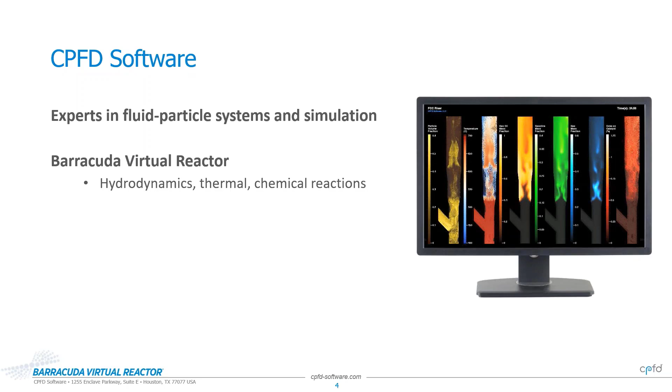Really, the software is used to look inside large-scale industrial units, assessing performance through simulation, determining the root cause of underperformance, what's happening inside where you might not be able to see, and reducing the risk of changes through virtual testing, testing changes, design or operational on the computer instead of on your actual unit. And a side effect is you often identify additional optimization opportunities, and this is true whether the software is used on designing new systems or troubleshooting an existing unit.

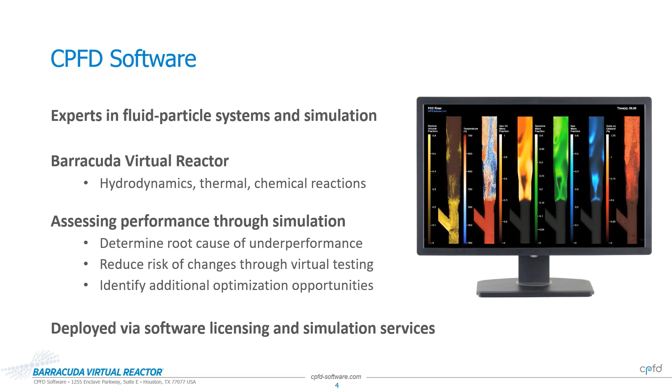Virtual Reactor is deployed with software licensing and simulation services. So there's my introduction. We're glad you're here.

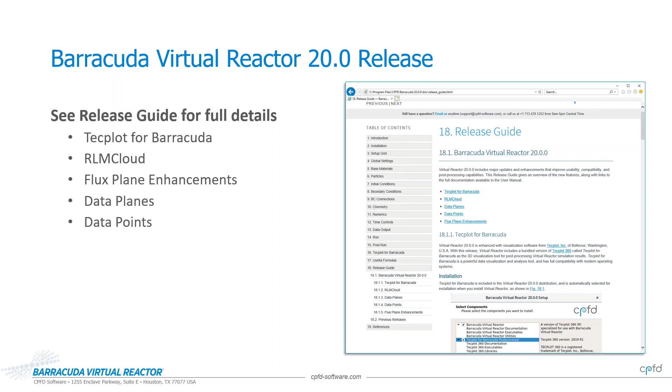The first feature I'd like to talk about is version 20 support for RLM Cloud, which is an easy-to-use cloud-based solution for serving Reprise License Manager, or RLM, licenses. There are several reasons you might want to use RLM Cloud instead of or in addition to a traditional on-premise RLM server.

One, it eliminates the need to configure and maintain an on-premise RLM server, which can reduce IT administrative tasks. Two, it allows you to easily serve RLM licenses to cloud computing resources, such as machines running on AWS, Google Cloud, Azure, and others. And three, it allows you to easily increase your license count, for example, if you need some short-term licenses to meet a project deadline.

If you're interested in learning more about RLM Cloud or switching your current on-premise RLM license to RLM Cloud licenses, you can contact us and we'll be happy to help.

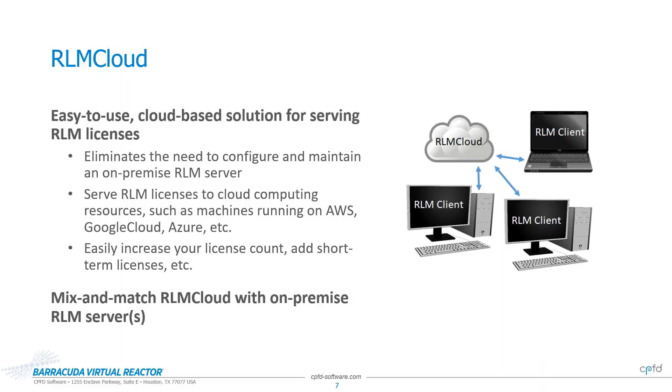So I'm going to drop out of PowerPoint now and bring up a Virtual Reactor version 20 GUI to demonstrate a few things. Related to RLM Cloud specifically, we built a new license manager interface to make it easy to point RLM client machines to both on-premise and RLM Cloud license servers.

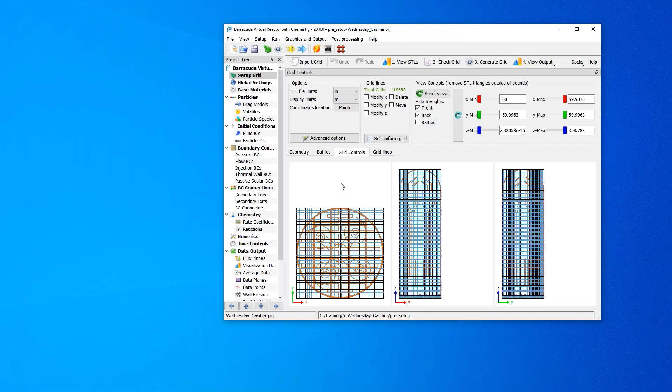So let's take a look at flux planes first. For anyone who's not familiar with flux planes, these are high-frequency output files that allow you to track fluid and particle flow through specific planes in a Barracuda simulation. You can get detailed information about the composition of all materials flowing through flux planes as well as raw particle data. Flux planes are extremely useful and many Barracuda users make extensive use of them.

In version 20, we've improved the way that users specify the location of flux planes within the simulation domain. When you click on the Select Plane button, you now get a reference grid dialog that allows you to click and drag to specify the position and size of each flux plane. You can grab the edges of the red rectangle to change the flux plane size. You can click and drag within the red rectangle to move the flux plane.

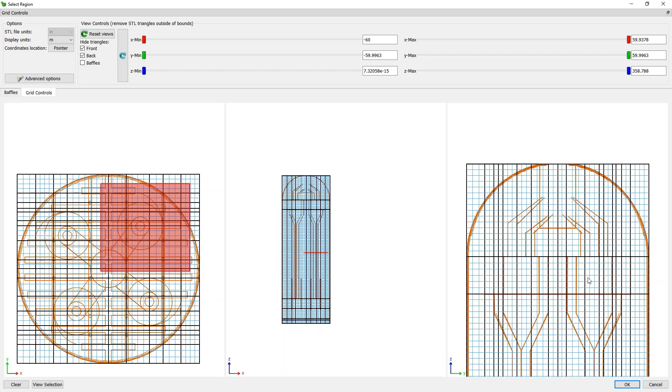And then when you click OK, the XYZ limits of the flux plane are filled into the text boxes based on the graphical region you defined. You can still type numbers directly into the text boxes if you know the exact position you want for the flux plane, or you can use the min and max keywords to refer to the minimum and maximum extents of the simulation domain.

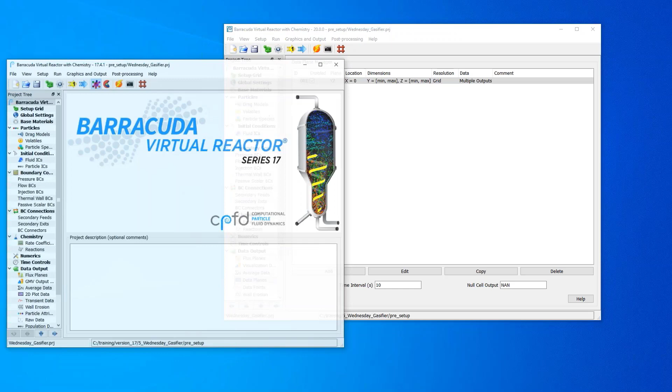So next, we'll go to the data plane section of the GUI. This used to be called 2D plot data in previous versions of Barracuda. So I've brought up a version 17.4.1 GUI as well, just to remind you how this dialog used to look in case that's helpful. Data planes offer a way of getting relatively low frequency information from a simulation at points spaced evenly on a 2D plane within the domain.

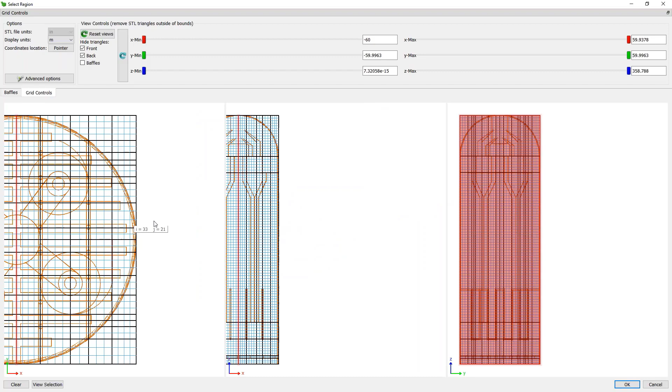Barracuda users often use this kind of output to create plots of temperature versus height or fluid velocity versus radial position, for example. In version 20, Data Planes has a list manager style similar to other sections of the Barracuda GUI, and there's no limit to the number of data planes in any orientation. So if we open up the definition for a data plane, you can see that it can be located graphically using the click and drag with the mouse, very similar to flux planes, or by typing in the XYZ coordinates directly.

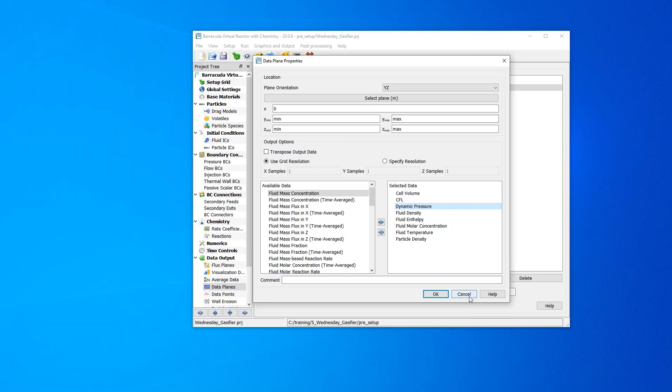A selection manager in the bottom half of the dialog allows you to select as many data output items as you want from the left side, and then bring them over to the selected data list on the right side. There are a few other options here in this dialog, but for the sake of time, I'm not going to cover them right now. But if you click on the Help button, it will bring up the data plane section of the user manual with full details.

So exiting this data plane definition, a couple more things are worth mentioning. First, we've added a new text box where users can specify a string they want to use for the null cell output. This will make post-processing data plane information easier, allowing you to specifically exclude any null cells that are outside of your simulation domain. Secondly, we've improved the naming conventions for the data plane output files so that they're easier to find and identify in your project directory.

All data plane output files begin with the word plane and then are named intuitively to help you quickly identify the variable contained in each file. One thing to note is that this improved naming convention is only applied to new projects created in version 20

by default. The reason for this is that if you define 2D data output in an older version of Barracuda, you probably already have post-processing scripts that refer to those files that use the older naming convention. So we didn't want to break those scripts if you bring your project up to version 20. So it is possible to switch to the new naming convention, and you can contact support if you want to do that.

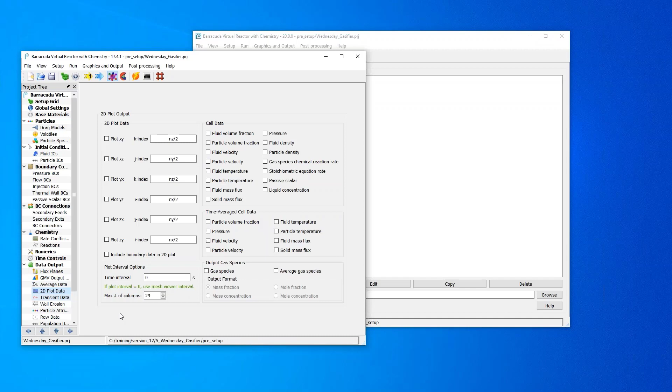The last data output enhancement that I'll discuss here is data points. This used to be called transient data in previous versions of Barracuda. Again, I'll bring up a 1741 GUI to show what this used to look like. So data points are high-frequency data output entities located at specific points within the simulation. Barracuda users often place data points in locations where they have thermocouples or pressure taps in their physical systems in order to get the same kind of data from virtual reactor simulations.

In the version 20 release, the data points interface has been reworked to use a consistent list manager style that you see throughout other sections of the Barracuda GUI. You can define as many data points as you like, and if we open up a data point definition, you'll see that we've added the ability to graphically select the point location using the Select Point button.

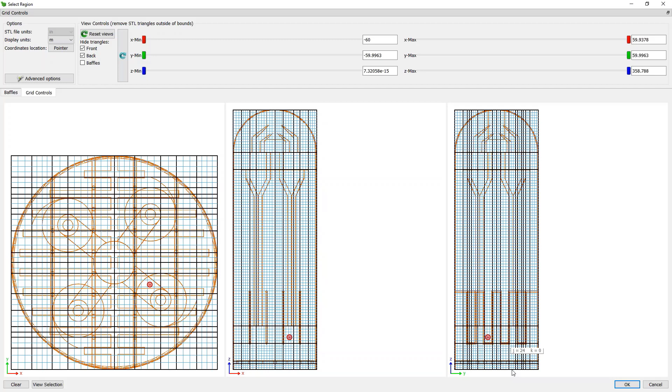This brings up a reference grid dialog that allows you to click and drag the red point to locate it within the simulation domain. When you click OK, the XYZ coordinates of the point are populated in the text boxes. You can type in XYZ values directly into these text boxes as well if you know exactly where you want your data point to be located.

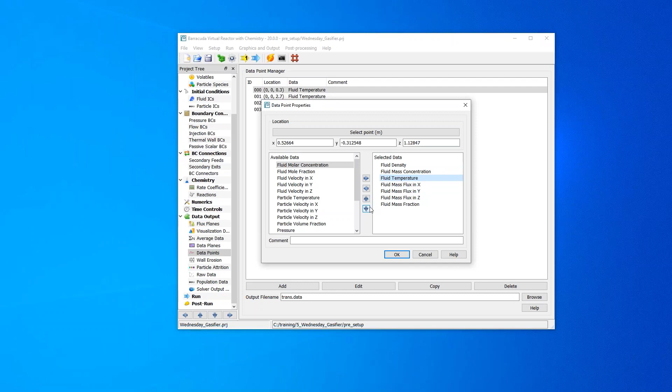An available data, selected data interface, similar to the one we just saw in data planes, is used for data points as well. You can choose as many items from the left as you want and bring them over to the right for inclusion in the output file. All of these selected items will be output for the specific location in space. And you can reorder columns of data in the output file by using the up and down arrows. So that covers the data output enhancements for version 20.

So let's turn to Tecplot for Barracuda, our new default post-processing tool. First, a few details that I want to mention regarding this bundled version of Tecplot 360. One, your license to use Virtual Reactor 20 also includes a license of Tecplot for Barracuda at no additional charge. This allows you to post-process virtual reactor simulation results with Tecplot 360. Two, Tecplot for Barracuda uses the same RLM server as Virtual Reactor in order to check out a license. There is no license imposed limit on the number of instances of Tecplot for Barracuda you can open simultaneously.

And three, a full Tecplot 360 license, which is not included as part of Tecplot for Barracuda, is required to post-process simulation results from other products. And so please contact Tecplot directly if you would like to purchase a full Tecplot 360 license.

Now, some of you may have watched our previous webinar presented in conjunction with Tecplot, which was called Getting Started with Tecplot for Barracuda. In that webinar, we looked at many things that Tecplot can do from a high level, including some advanced post-processing topics. But today's webinar will be different in that our goal is to show you step-by-step instructions for day-to-day post-processing tasks. We're going to go slower, narrate each click, and explain things as we go. We won't get into advanced topics, but rather we want to cover the basics in more detail.

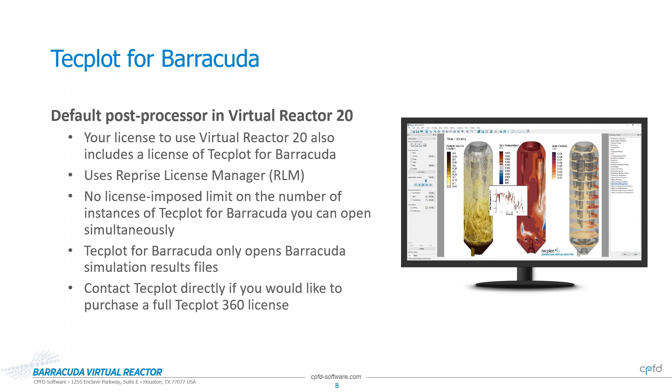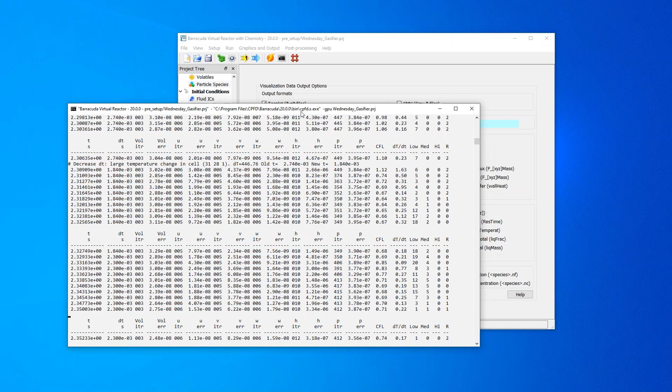So for our demonstration today, I started this simulation just before the webinar in order to have a few results files available, but the simulation is still currently running so that we can show you how to rescan for new results files. So to open Tecplot for Barracuda, you can use any of the buttons in the GUI for 2D or 3D visualization. So I'm going to click on the View Boundary Conditions in the Run window.

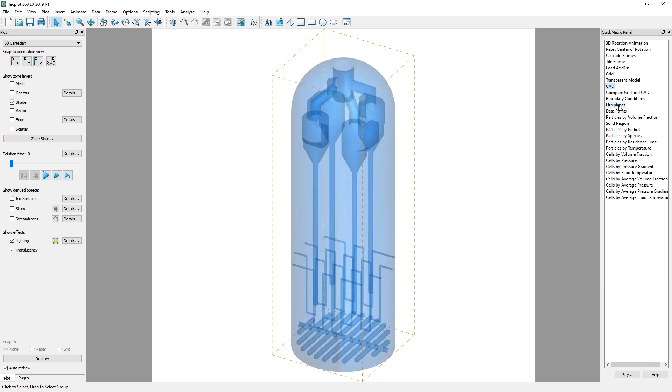And on the right-hand side of the screen, there is a quick macro panel with the shortcuts to all of the predefined views you might be familiar with from the Barracuda GUI. Double-click on the items to bring up the views such as Grid, CAD, Fluxplanes, Data Points, Particles by Volume Fraction, and so on.

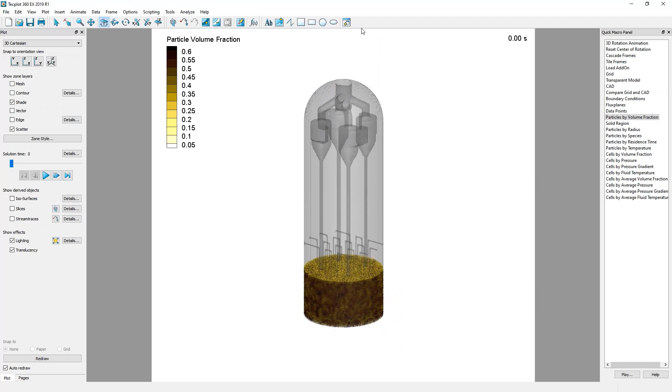You can manipulate your view by using buttons in the top toolbar. For example, there are several rotation methods available. You can choose one and then click and drag to rotate the model. You can right-click and drag to translate the model. And click and drag the middle mouse button for zoom. Push away from yourself to zoom out and pull towards yourself to zoom in. And then you can right-click to exit any special mouse mode you're in and get back to the regular select mode.

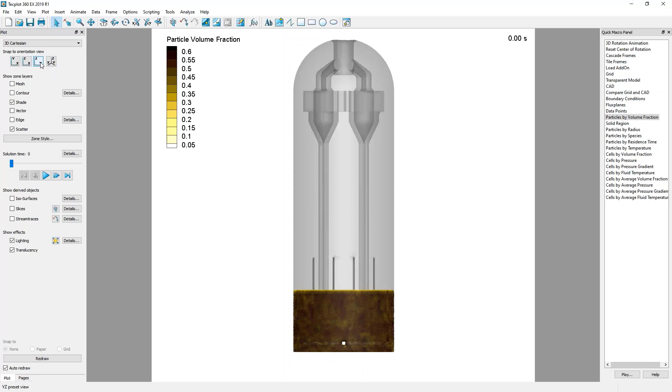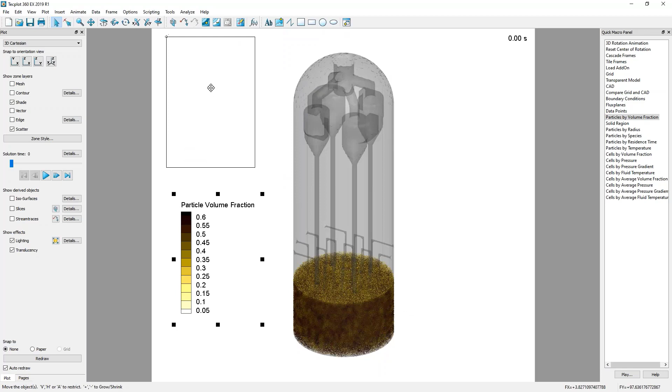There's a set of snap to orientation view buttons that are quite nice for getting views at a specific angle. You can look straight onto the model in the 3 major directions or get back to the default angles by using the rightmost button. Within the Tecplot interface, many items can be selected by clicking and edited by right-clicking or double-clicking. You can also move items around within this frame by clicking and dragging, and then most items will show available options if you right-click on them.

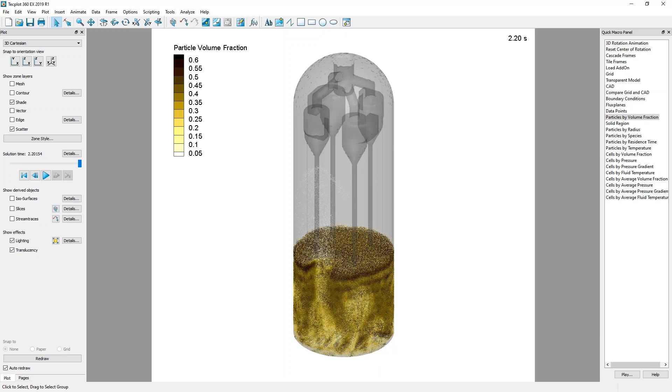Barracuda simulations are transient, and you'll often need to move from one time step to another within the Tecplot interface. The solution time slider and controls allow you to do this very easily. You can drag the solution time slider to any currently loaded time, or you can use the control buttons to play through time, step forward or backward one solution time, or go to the beginning or end time steps. So if I go to the end time step here, you can see that we're out 2.2 seconds.

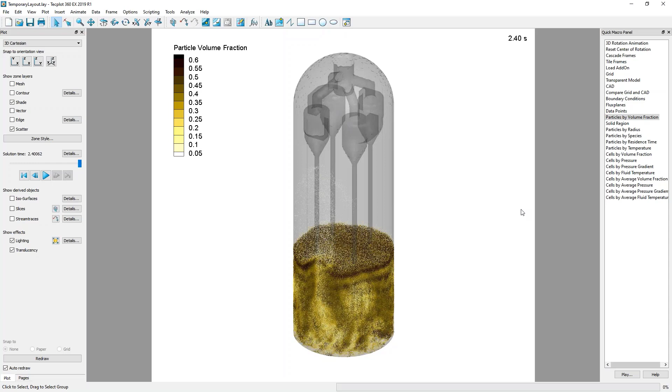Since the simulation has been running in the background, we can now rescan to load any new output files that have been created by Barracuda since we opened this Tecplot GUI. To do this, click on File, Load Barracuda Data, and click on the Rescan All Data button. Okay, then click on the Go to End Time Step button, and now we can notice that the time is 2.4 seconds.

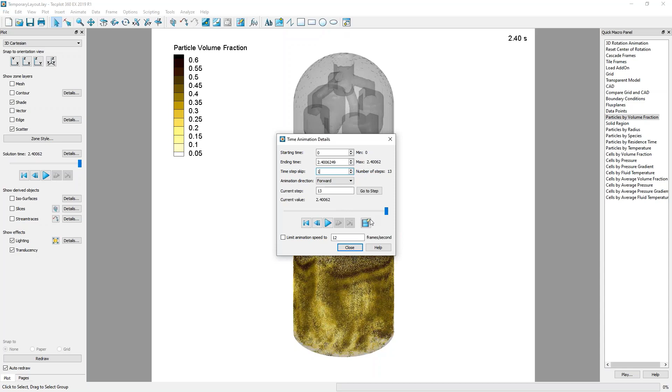So creating an animation of the current view is done using the Details button. Click it to open the Time Animation Details dialog. Tecplot gives you a lot of options here, including the start and end time for the animation, as well as the ability to skip steps. Click the movie reel icon to open the export dialog. Here you can choose from many different output formats, including video and image sequence formats. In this dialog, you can also adjust a number of other things, including the animation speed for the output video file.

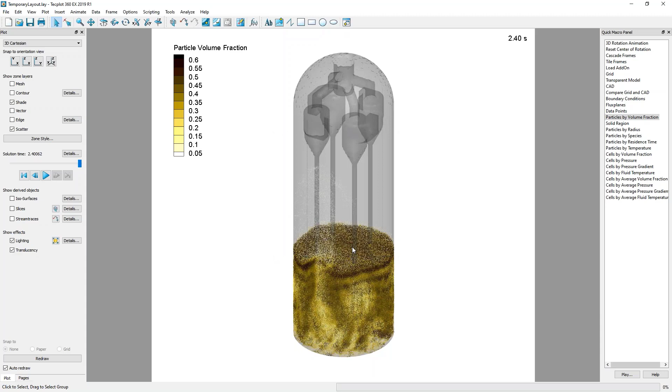Okay, next, let's look at adjusting the color bar. Double-clicking the color bar brings up the Contour & Multi-Coloring Details box. There are many things that you can adjust within this box, so I encourage you all to explore it on your own as you start using Tecplot. Tecplot also has great documentation built in, so you can always click the Help button to get full details on all available options. For today, I'll focus on just a few of the most basic things that Barracuda users will want to use on a day-to-day basis.

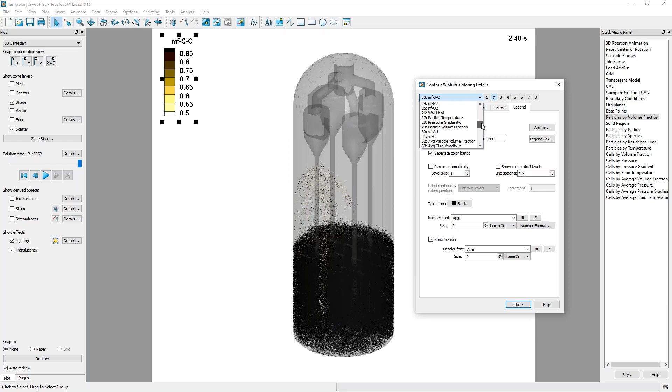First, notice the drop-down box on the top left of the dialog. This shows the currently selected variable by which your cells or particles are being colored. You can select different variables by using the drop-down and clicking on the variable name. Note that all the possible variables are shown in the list, so you need to select the appropriate cell or particle variables based on the context of what you're doing. For this example, though, we'll stick with particle volume fraction.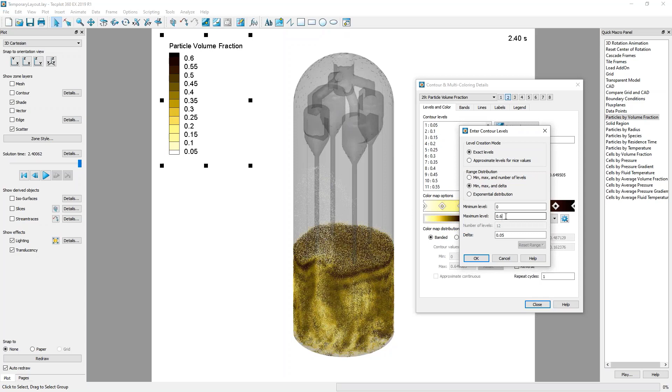So next, let's click on the Levels and Color tab. A common task when post-processing is adjusting the numerical limits of the color bar. This lets you zoom in on specific ranges of data and highlight important details of the simulation results. Use the Set Levels button to bring up the Enter Contour Levels dialog. We've found that the Min, Max, and Delta option is very nice. Here, let's set the Min to 0 and leave the Max at 0.6 and set our Delta to 0.1. When we click OK, you can see that the numbers on the color bar have been adjusted accordingly.

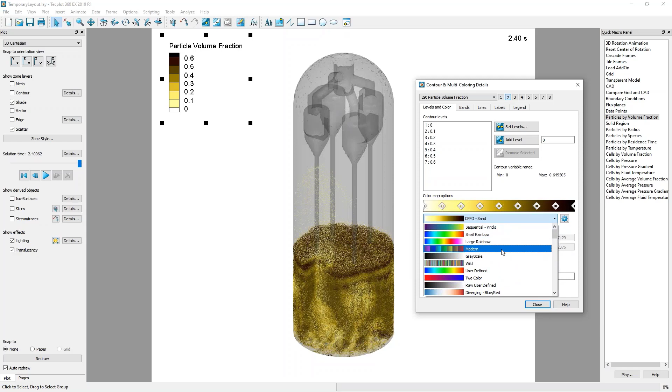Another nice feature of Tecplot is that it has a very large selection of built-in color maps. You can click the drop-down menu to see all of the available options. So if you feel nostalgic about GMV, you can always choose Small Rainbow and you'll feel right at home. It's also very easy to reverse your color map by checking the reverse box.

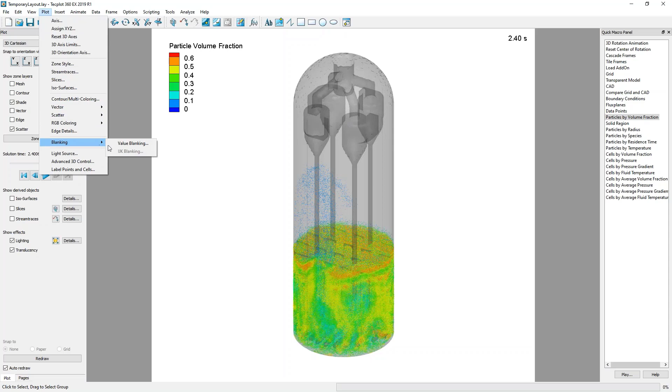The next topic I'd like to cover is blanking. In Tecplot, the concept of blanking allows you to hide specific cells and/or particles based on a user-defined criteria. You can go to the Plot menu and choose Blanking, Value Blanking. And let's start with the particle phase.

In the Wednesday gasifier, we have 2 particle species in the fluidized bed. Species 1 is our initial bed, and species 2 is fresh coal that is fed in at the side of the vessel. So let's blank species 1 so that we only see species 2. First, check the box for Include Value Blanking. Then we'll set our criteria to blank when the species index is equal to 1.

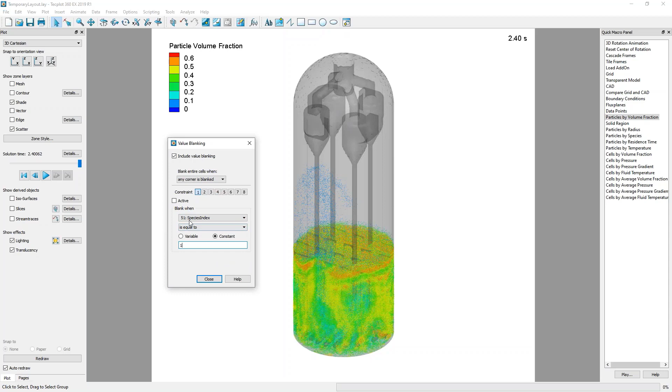When we click the checkbox for active, we can see that this blanking criteria has been applied because the initial bed particles are no longer visible. Blanking can also be used to show spatial subsets of the system by hiding cells. Our particle blanking definition used constraint number 1, and you can see that up to 8 constraints can be defined at the same time. Let's use constraint number 2 to blank when y is greater than 0.

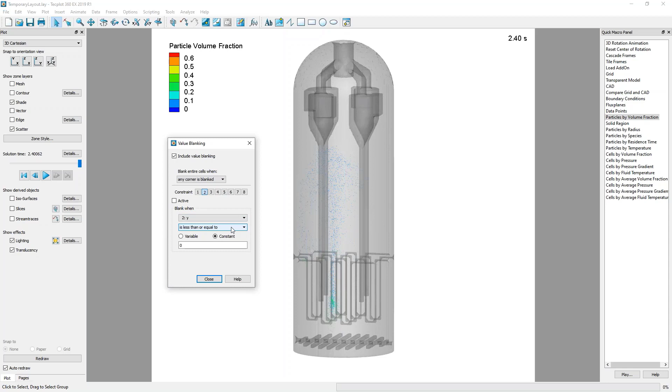When we make this blanking criteria active, we can see that both cells and particles that meet the criteria are hidden from view. So next, I want to introduce the Zone Style dialog. Click the Zone Style button to bring up this window. Almost every aspect of the view shown in Tecplot can be adjusted in this dialog, and you can see that there are many tabs, rows, columns, and settings available to let you work with your view.

For now, I'd like to point out something specifically related to particle blanking. When we blank particles, it is often the case that the remaining particles on screen are a little difficult to see clearly. The default view for the particles is a single pixel, which works well for full beds of particles, but can be tough when you're looking at just a small number of particles.

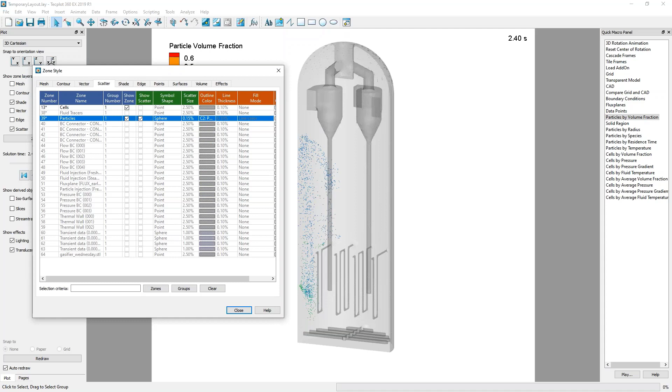So you can right-click the symbol shape column in the particles row and choose sphere. Right-click the scatter size and choose 1%. We can now see the particles much more clearly. The rendering time for spheres is longer than for single pixels, but in cases like this, it's still very fast, and it helps us to see our data more clearly.

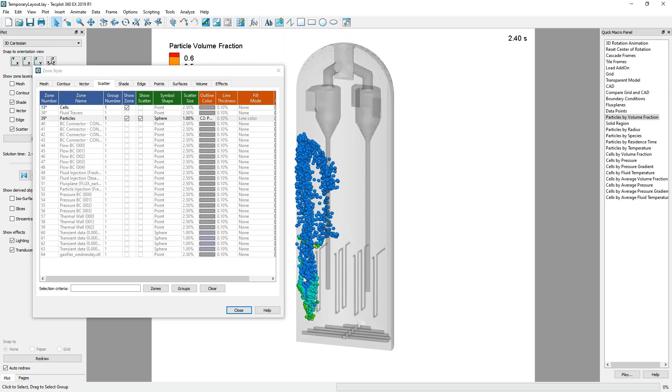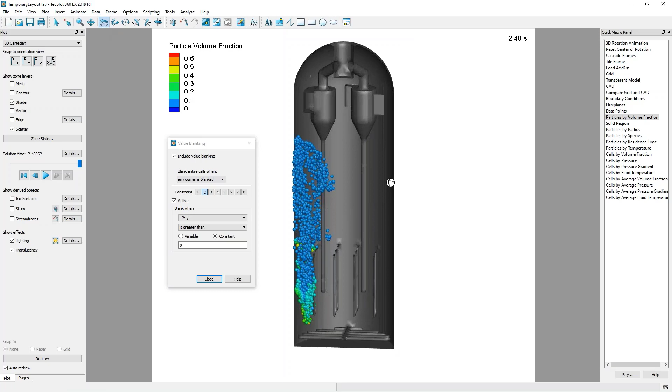Another view option that Barracuda users will often want to adjust is the transparency or translucency of the vessel on screen. If we right-click on the cells shown on screen, we can select different levels of translucency or disable the translucency completely. By clicking the main translucency button, we can get a view that looks like we've cut a solid vessel in half and are looking inside of it. Clicking the same again re-enables the translucency so that we get back to the original semi-transparent view.

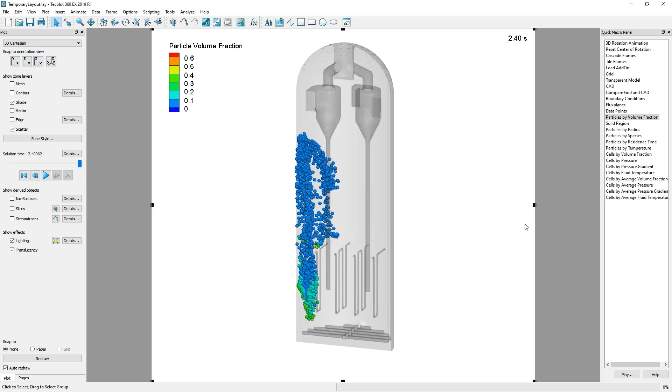So next, let's touch on the idea of frames in Tecplot and the ability to tile them so that you can see multiple views of your simulation results in the same window. Click the outside edge of your frame to bring up the black handles. Use Control-C to copy and Control-V to paste. Then go to Frame, Tile Frames, and choose the vertical tiling option. This will arrange our two frames side by side, and then we can start to adjust either frame individually.

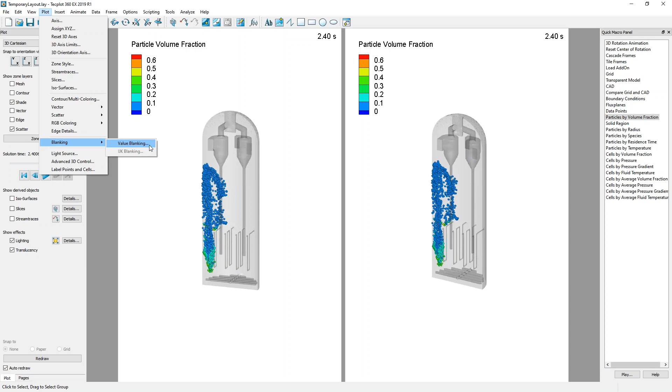In our new frame, let's disable the blanking that we had previously defined. Go to Plot, Blanking, Value Blanking, and uncheck the Include Value Blanking option.

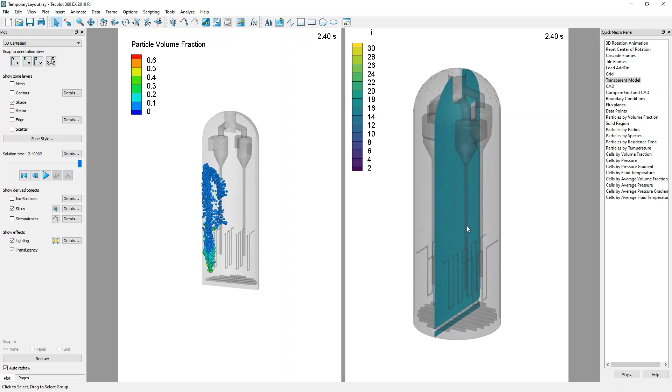I'd like to show how to use slices in Tecplot. So let's get our transparent model view by double-clicking the Quick Macro Panel item for that. Next, click the Slices box on the left panel. You'll see the default central slice come up in our current view. There's a nice interactive slicing tool that you can activate by clicking the small icon next to Slices or on the top toolbar. Let's do that, and then we can click and drag the slice to a new position very easily. You can access more options for slices by clicking the Details button.

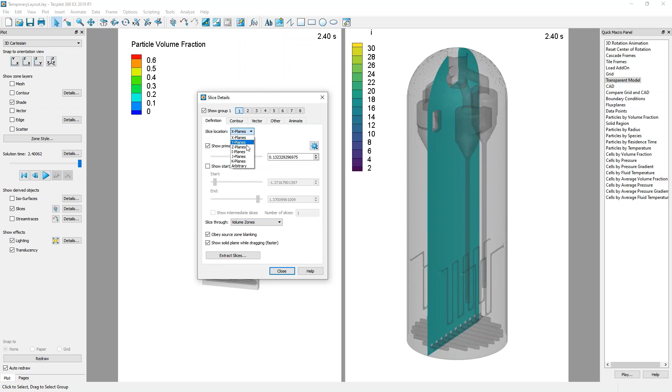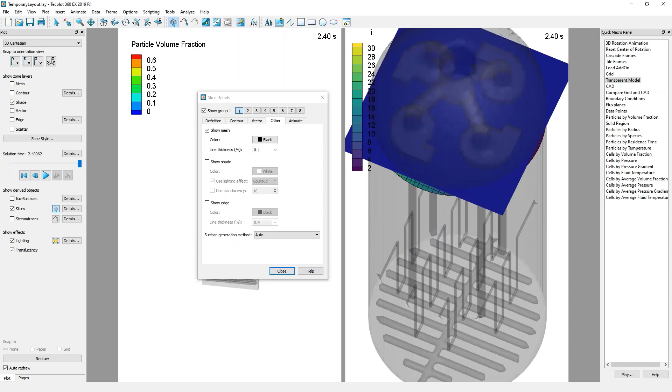One very nice feature about slices is the ability to turn on the mesh. Let's switch to a Z-slice to illustrate this point. Go to the Other tab and check the box for Show Mesh. If we rotate our view and then zoom in a little more, you can see how showing the mesh and moving the slice with the interactive slicing tool can be very helpful and convenient for inspecting the grid in models that have complex internal geometries.

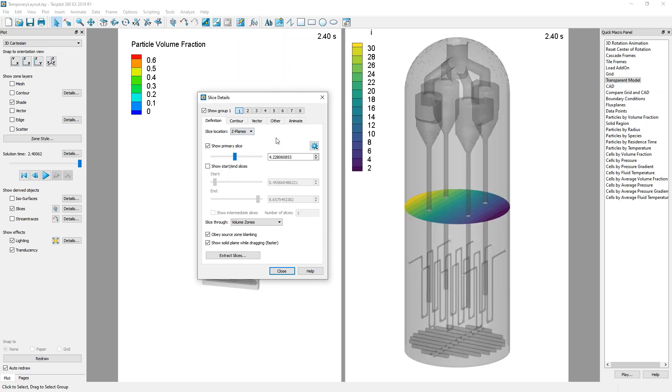Let's disable the mesh for now and go back to the Definition tab to look at a few more important options. You can use the Slice Location dropdown to change between X, Y, and Z or other orientations, just like we did to do the mesh slice. So let's keep it on Z-plane option for now, and we can disable the primary slice and then check the box for Show Start End Slices.

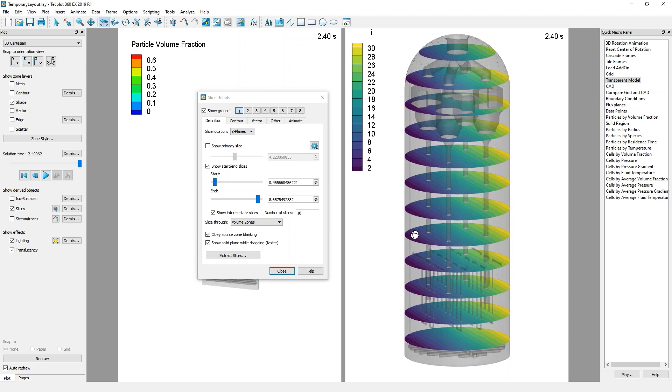Let's also check the box for Show Intermediate Slices and specify that we want 10 slices. As you can see, it's very easy and quick to create many evenly spaced slices, which is often a great way of communicating your three-dimensional simulation results.

So let's change the variable that we're using to color the slices by. Double-click the color bar and use the drop-down menu to choose a different variable. Instead of I, let's choose mole fraction of methane. You can see that the slices have changed and are now showing this different variable.

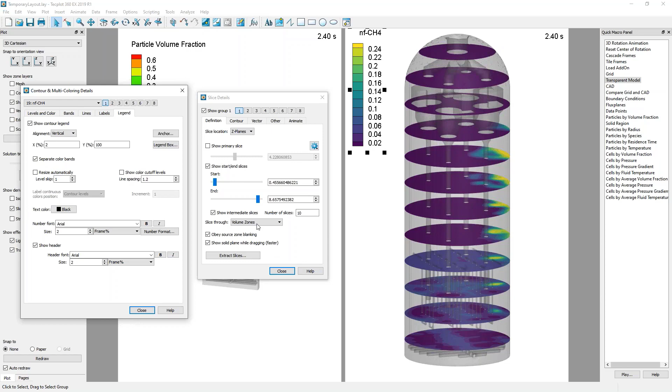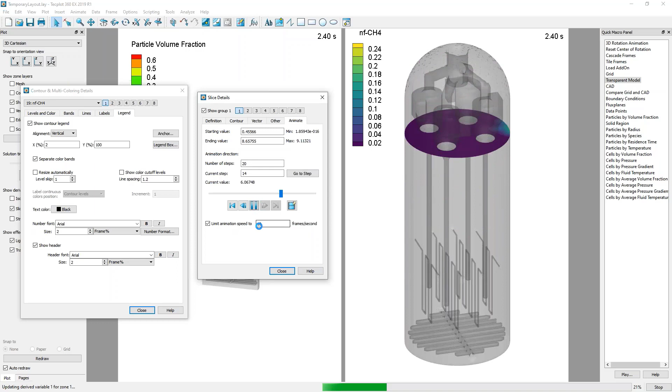Finally, let's disable the start and end slices and re-enable that primary slice. Then go to the Animate tab, which allows you to animate the slice in a number of different ways. For example, you can limit the animation speed to 10 frames per second and then play the animation. This animation can also be exported to a video file in the same way as our transient solution time animation discussed earlier.

So that covers the items that we wanted to highlight for post-processing three-dimensional simulation results. So let's turn our attention to plotting XY data now. Virtual Reactor outputs a number of data files that contain columns of simulation output information, and Tecplot for Barracuda can be used to make XY plots of this data.

So let's create a new page using the Pages tab. Click Add, and then let's name our page for easy identification. We'll call it XY Plots for now. And you can see that we have a blank frame at first, and we need to load our XY data into Tecplot. You go to File, Load Barracuda Data, and choose Load Data File. For this example, let's choose our flux plane that we defined to measure particle entrainment. Browse for the file and click Open.

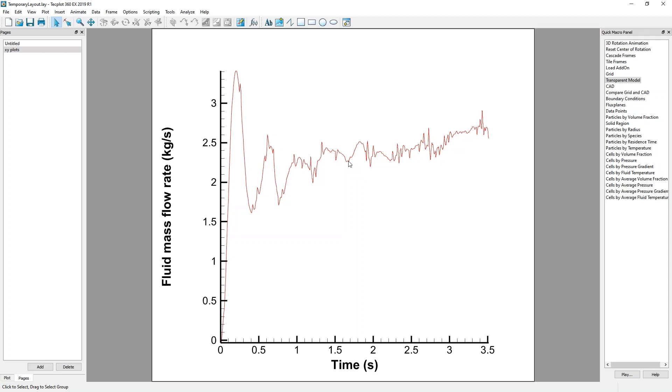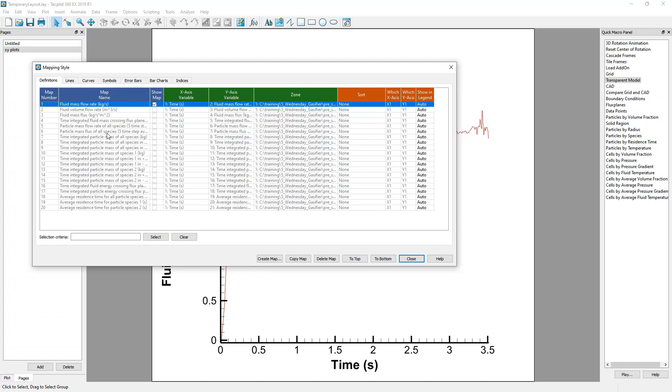By default, Tecplot will show column 1 versus column 2, but it has actually loaded all the data from the file into memory. We can choose a different column of data to plot by double-clicking the line. This brings up the mapping style dialog, which is similar to the zone style dialog we used earlier for 3D data. Tecplot reads in all of the column header information from the data file, and the map name column shows us the data available for plotting.

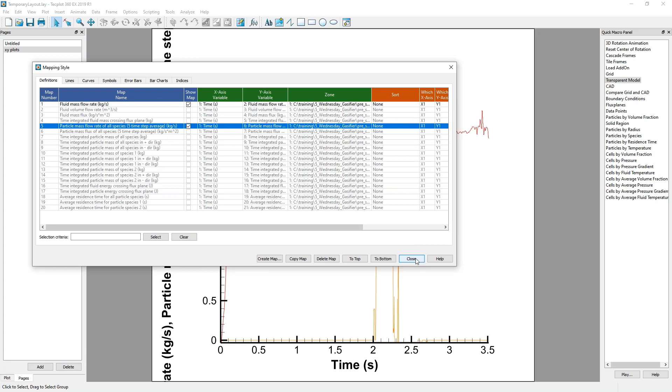We can check or uncheck boxes in the Show Map column to choose what is plotted in the current frame. So let's select fluid mass flow rate and particle mass flow rate for this example. Click in the plot frame and then press Ctrl F to auto scale the axes of the plot so that all currently plotted data is visible.

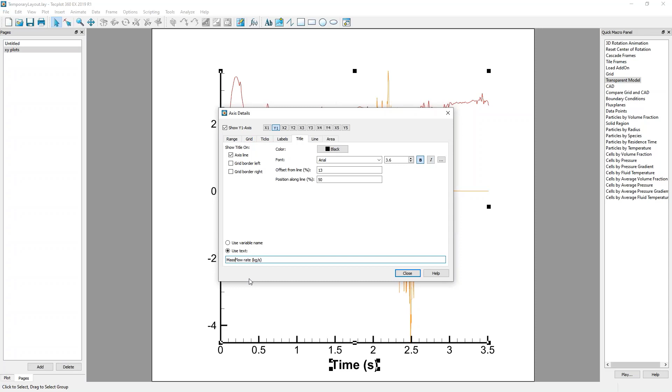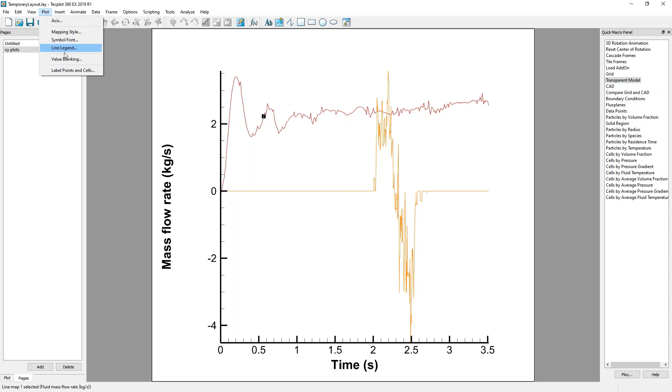You can change the axis titles by double clicking. For the y-axis, let's choose the use text option and set the label to mass flow rate in kilograms per second. When we click close, the new axis label is shown. You can also add a legend to the plot by choosing Plot, Line Legend. Check the box for Show Line Legend and then close the dialog.

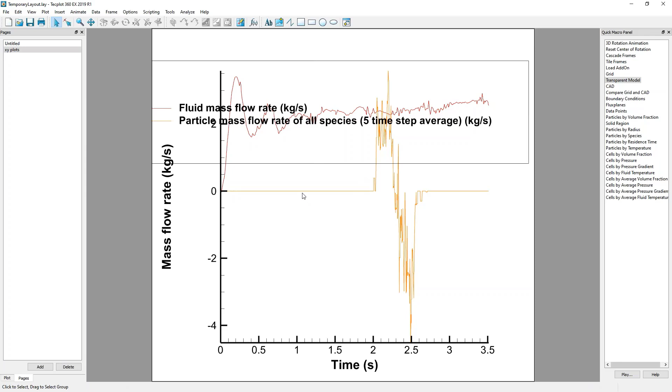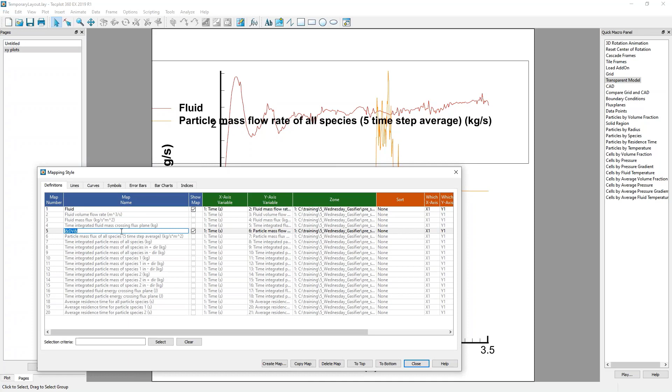Tecplot uses the map names from the Mapping Style dialog, so let's open that again and adjust the legend labels. Let's change the map name for row 1 to Fluid by double-clicking and then entering our desired text. And then let's change the map name for row 5 to Particles. You can see that the legend text has been changed, and we can drag the legend to a new position within the frame.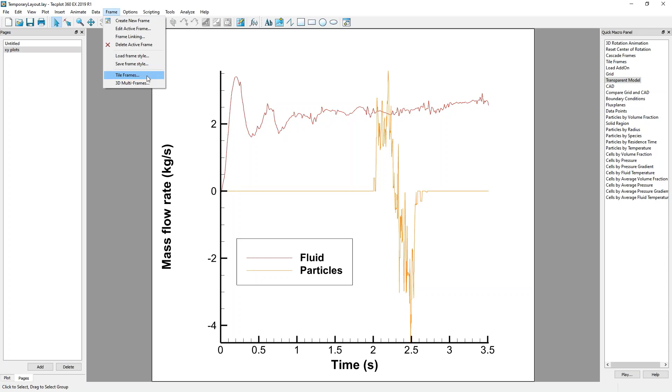You can have multiple XY plot frames on your page, similar to what we showed for frames of 3D views. These can be tiled in the same way so that you can arrange many XY plots on a single page. Using Control-C and Control-V, we can create many frames, and then going to Frame, Tile Frames, we can create a grid of plot frames. Then each plot can be edited individually to create several different plots from the same data file. You can also have some frames showing XY data and then other frames showing 3D data all at the same time.

The last thing that we want to cover today is the concept of using layout files in Tecplot. Once you have pages, frames, and views that you want to keep, you should save a layout file. This is similar to the concept of attribute files that you may have used in the past when post-processing with GMV. Click File, Save Layout, and enter a name for the layout file. In this example, we'll save it as My Layout.

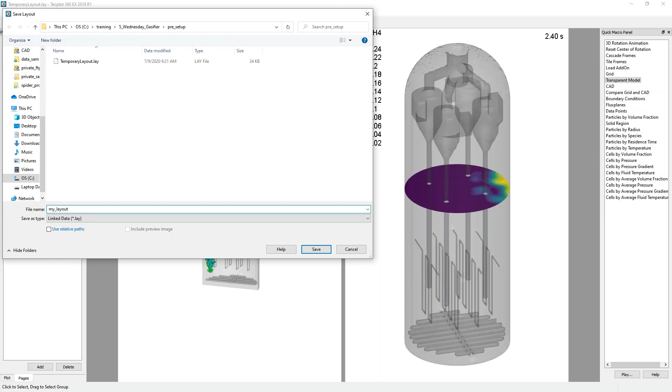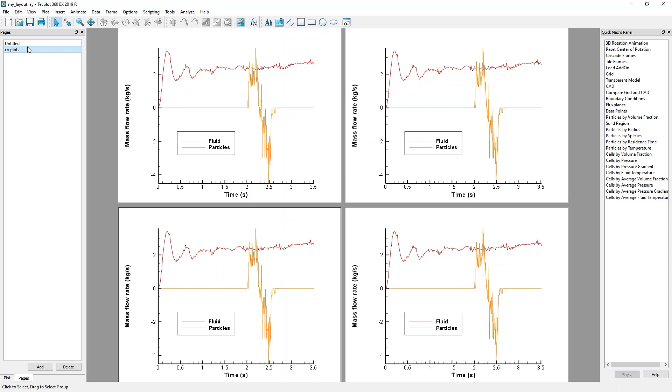If we close Tecplot at this point and then relaunch it from the Barracuda GUI, we can get back to the same view again very easily. Use the File, Load Barracuda Data tool and choose Load Layout. Then we can select the layout that we just saved, and then you'll get back to the pages, frames, and views that you previously defined. So that's everything that we wanted to cover today.

I'd like to point out that there are a number of resources available on using Tecplot for Barracuda. We've recorded a number of training videos specifically for post-processing Virtual Reactor results, and those are available on the CPFD support site. And Tecplot also has a large collection of Tecplot 360 training videos available on their site, which are not Barracuda specific, but they can be very, very helpful. Finally, detailed documentation is included with the installation of Tecplot for Barracuda, and you can access all of that information from within the Tecplot GUI.